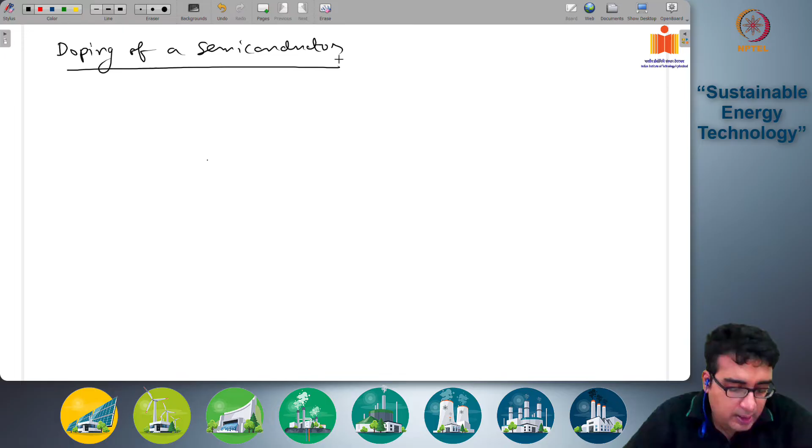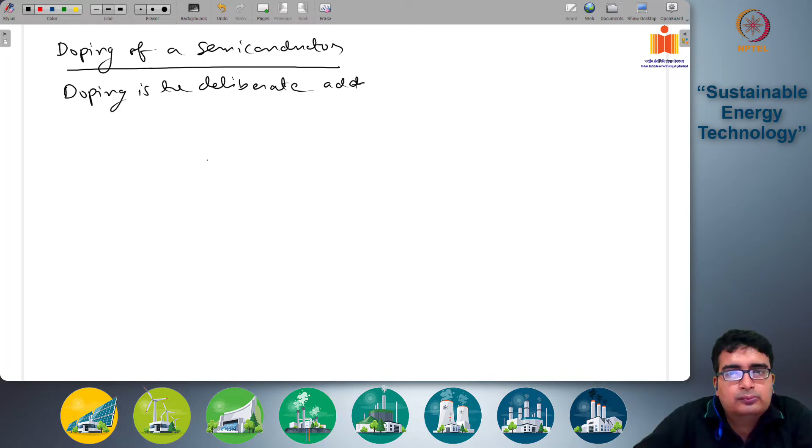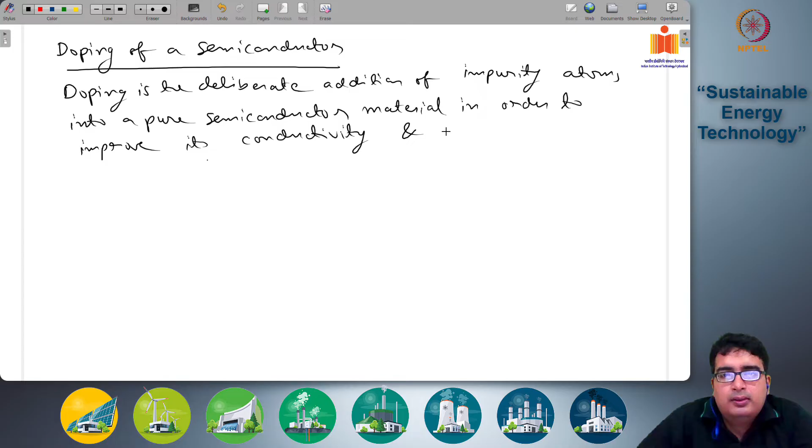Now, today we will discuss the concept of doping, which is very important in order to generate the PN junction diode. So today we discuss doping of a semiconductor. So here doping is the deliberate addition of impurity atoms into a pure semiconductor material in order to improve its conductivity and other electrical properties.

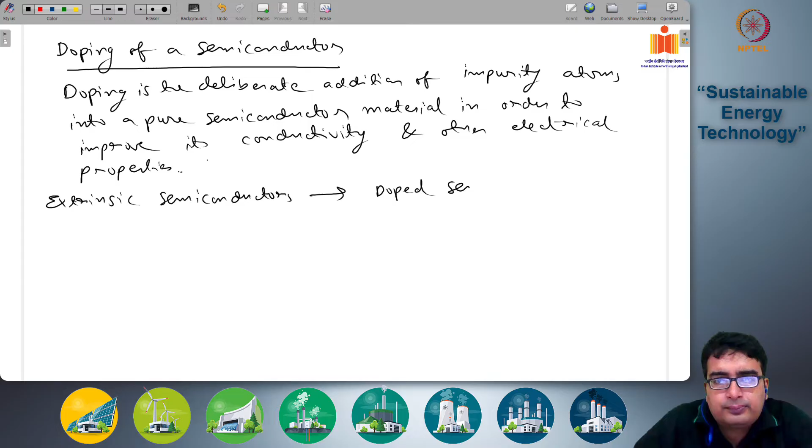So doping is you are adding a specific impurity atom into your pure semiconductor material in order to improve its conductivity and other electrical properties. So we have two terms. One term is called extrinsic semiconductors. These are doped semiconductors. And intrinsic semiconductors, which are pure semiconductors.

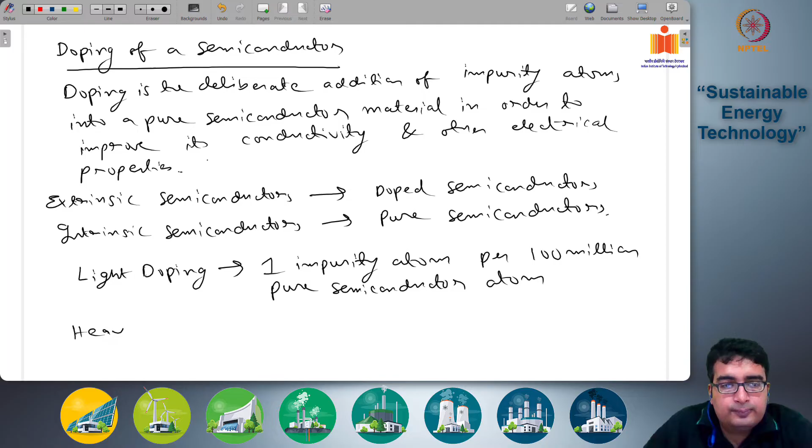Okay. Now the amount of impurity added is usually quite small. So we have several levels of doping. We call light doping to be the case that one impurity atom per 100 million pure semiconductor atoms. Okay, and heavy doping involves around one impurity atom per 1000 pure semiconductor atoms. So this one is parts per billion level and this is parts per 1000 level. So light doping and heavy doping, and you can have multiple ranges between these two as well.

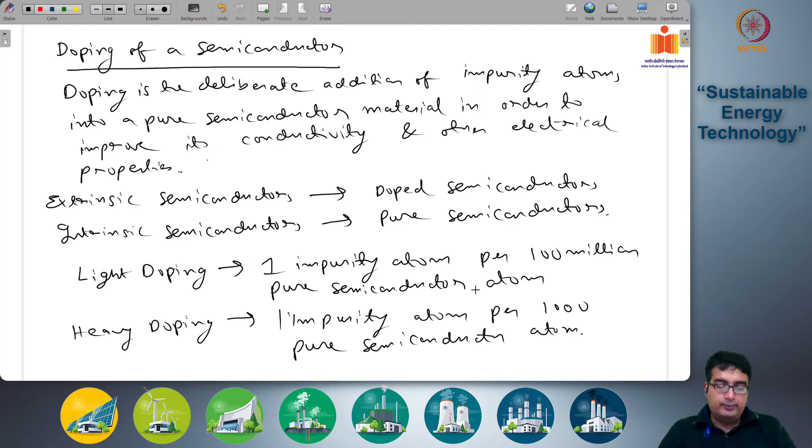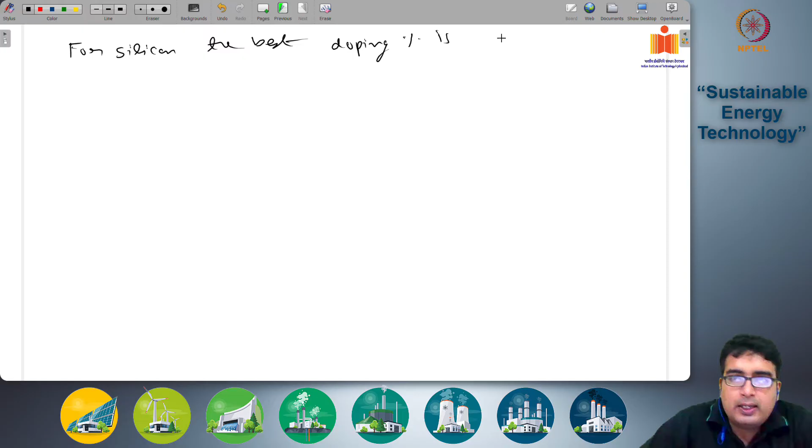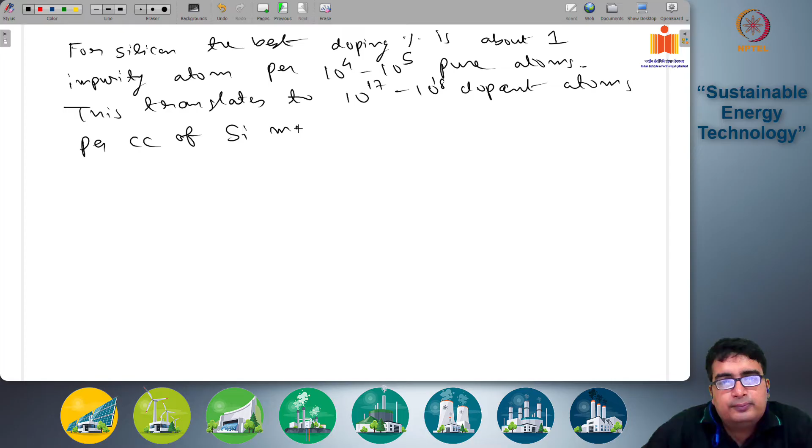For silicon, the best doping percentage is about 1 impurity atom per 10^4 to 10^5 pure atoms. So this translates to 10^17 to 10^18 dopant atoms per cc of silicon material. Okay. So for silicon, the best doping percentage is 1 atom per 10^4 to 10^5 pure atoms, which usually translates to 10^17 to 10^18 impurity dopant atoms per cc of the silicon material.

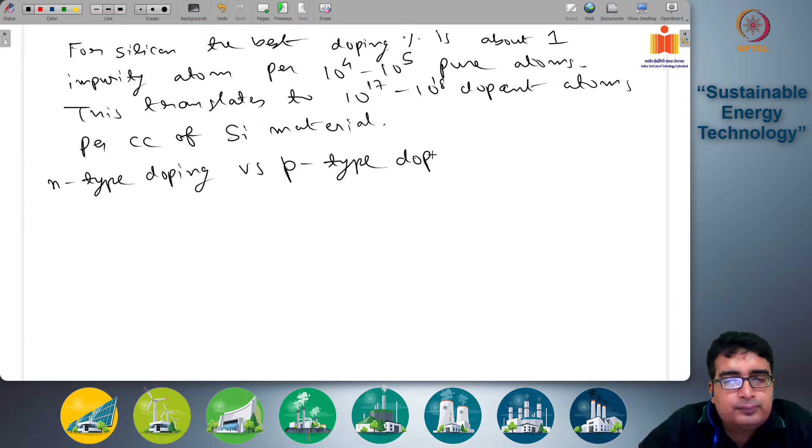Now, doping itself is used to improve the electrical properties, conductivity properties of silicon and other semiconductors. Now, why and how does this work? To understand that, we will see that there are two types of doping. One is called N-type doping versus P-type doping. Okay, so there are two types of dopings, N-type and P-type doping. Now, silicon has 4 electrons on its outer valence shell.

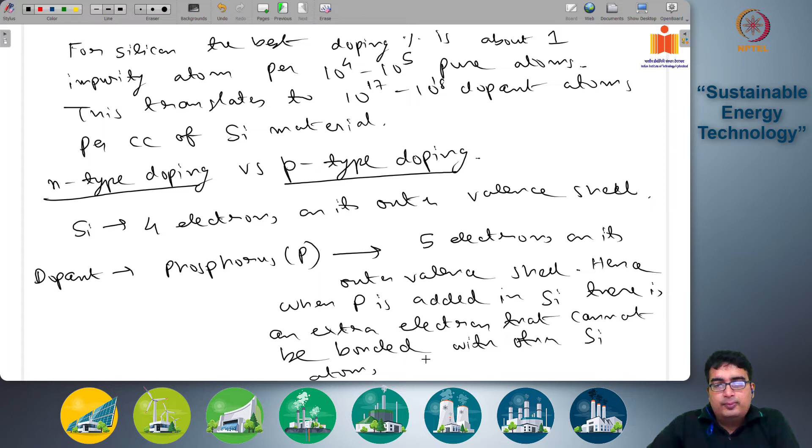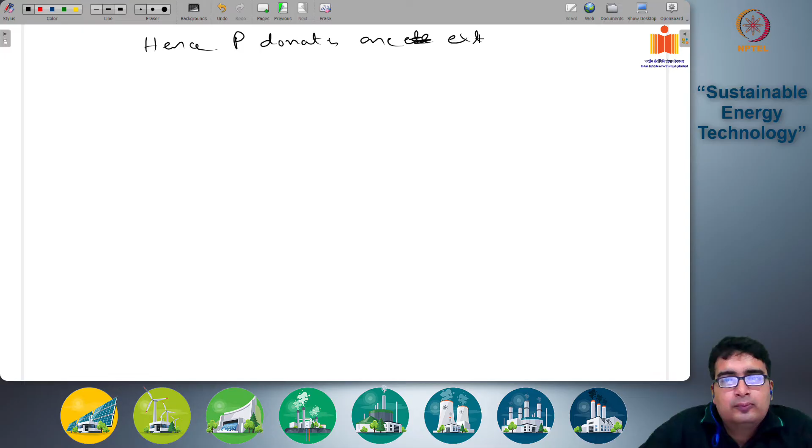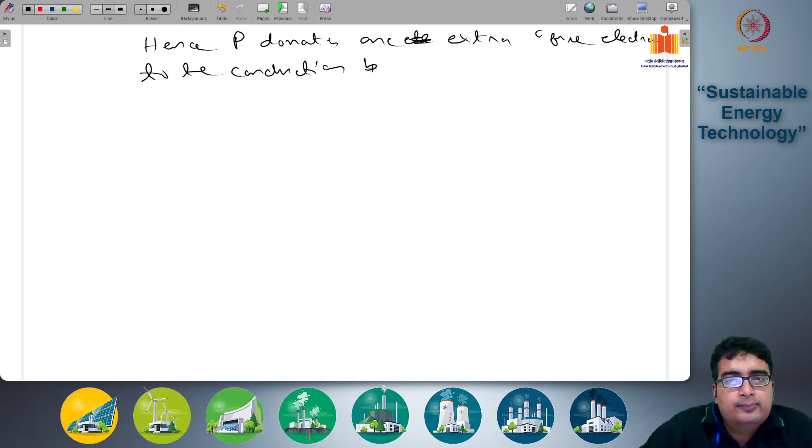So suppose you use phosphorus as an impurity. So dopant is phosphorus. This has 5 electrons on its outer valence shell. Hence, when phosphorus is added in silicon, there is an extra electron that cannot be bonded with other silicon atoms. Hence, phosphorus donates one extra free electron to the conduction band. Hence, it is an N-type dopant.

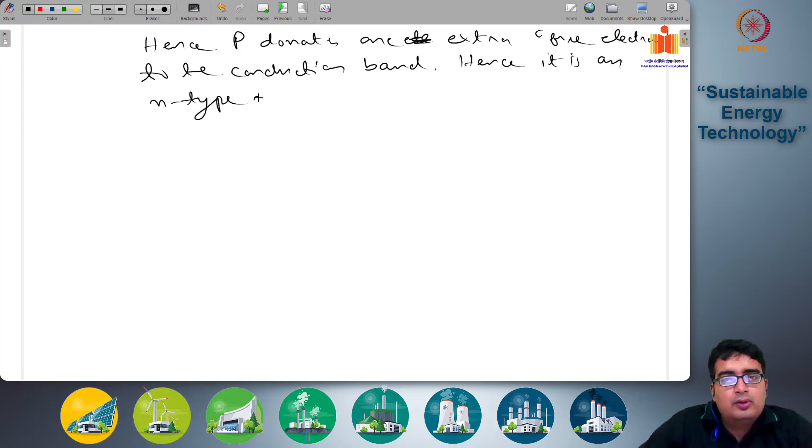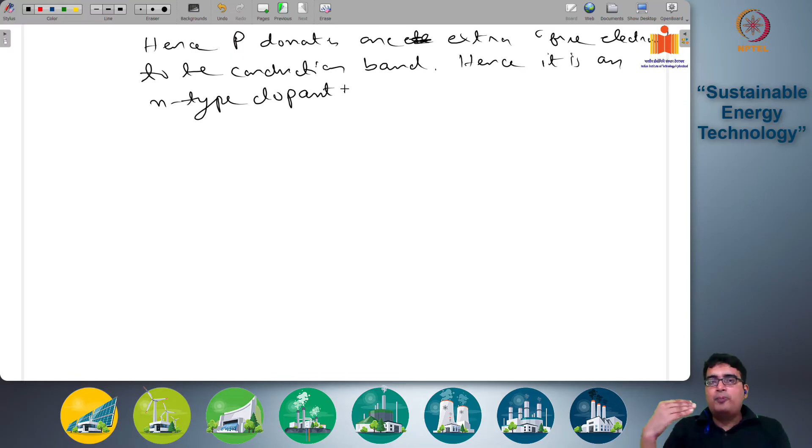So basically what is happening, silicon has 4 outer electrons on its valence shell, while phosphorus has 5. So when phosphorus is added as an impurity atom within the silicon structure, then there is one extra electron with phosphorus that cannot find a pair within the neighboring silicon atoms. And this extra electron becomes a free electron that is donated onto the conduction band of the silicon atom structure. And therefore, these are called N-type dopants because they act as electron donors, as they are a source of extra free electrons.

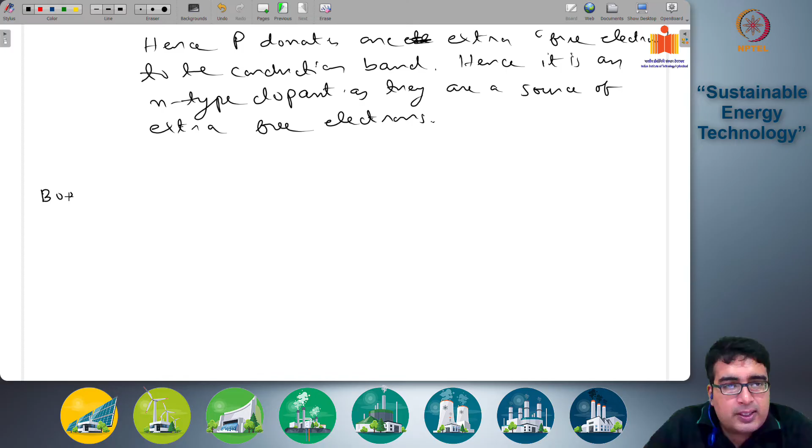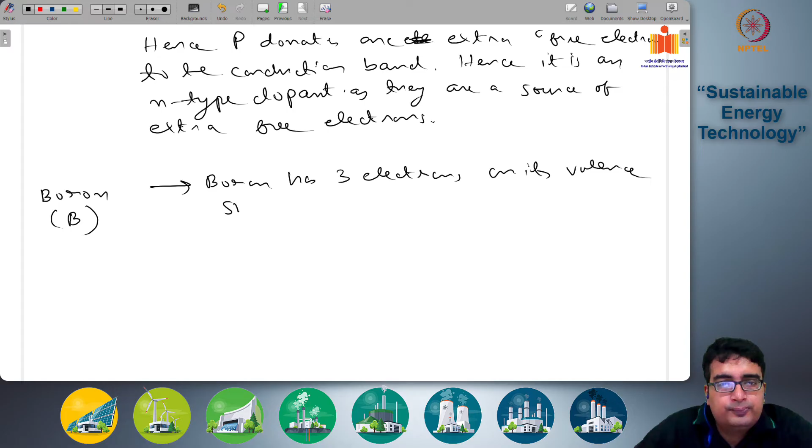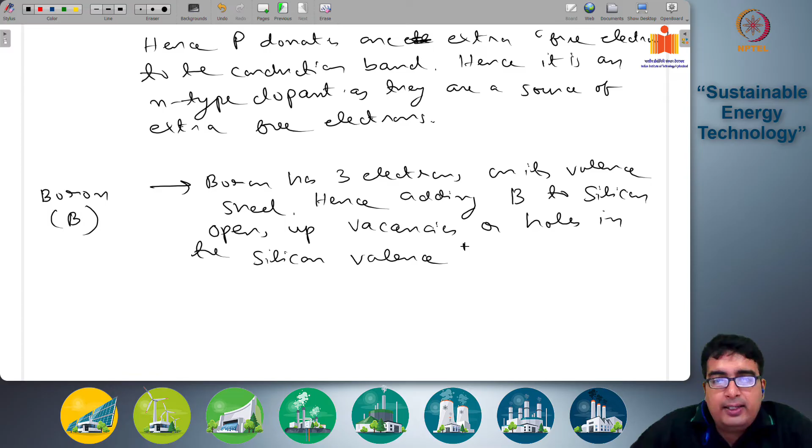But suppose instead of phosphorus we use boron. So boron has 3 electrons on its valence shell. Hence, adding boron to silicon opens up vacancies or holes in the silicon valence band, which can conduct electricity. Hence, these are called p-type semiconductors, as they act as a source of extra holes in silicon valence band.

So boron has 3 electrons on its outer valence shell. So if you add boron within the silicon structure, there will be one open space which cannot be filled by an electron around boron. So an extra hole is added into the valence band of your silicon material when boron is added to it. And this extra hole is also like a free vacancy which can move from one atom to the other, and hence can transport charges. So these are hence called p-type semiconductors, because they act as a source of extra vacancies in your silicon structure.

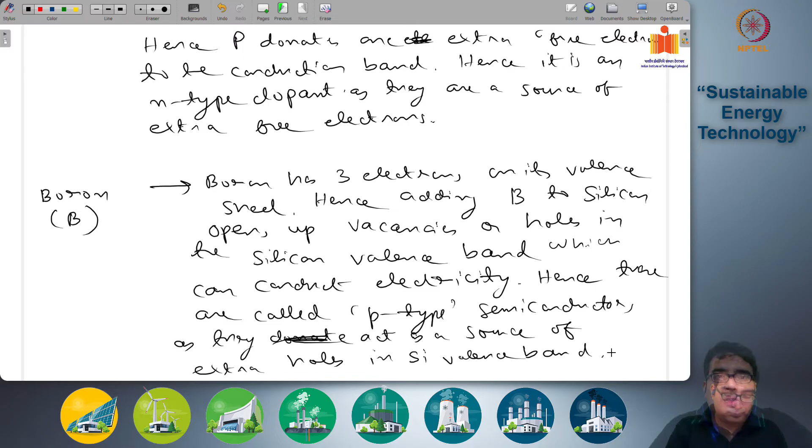So the idea is then like this. This is your pure silicon. This is your valence band. This is your conduction band. Okay. Now this is pure. Now we look at N-type. So suppose phosphorus has been added to it. Then close to the conduction band, the addition of phosphorus creates an extra zone of free electrons coming from the phosphorus impurity very close to the conduction band.

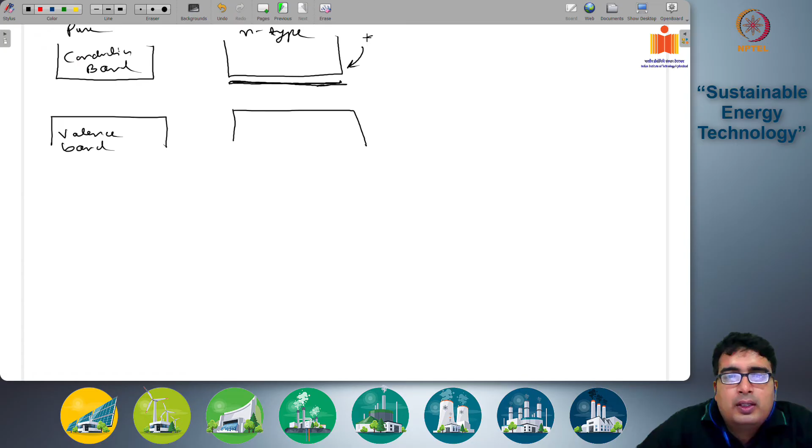Extra electron level. Okay. And these are very close to your conduction band, and hence these electrons can easily be promoted to your conduction band and hence help in conducting electricity

coming from dopant. Okay. Whereas for a p-type case, you have a set of empty spaces opening up close to the valence band. So these are extra vacancies from p-type dopant. So these holes here can easily move down, and these holes can move here. Okay.

As electrons can move from here to create this empty space here and fill up this empty space here. So it's as if the vacancies are moving down into your valence band. And this is called a p-type semiconductor. Now the effect of N-type and p-type doping is to raise or lower the Fermi level closer to the conduction and the valence band. So what it looks like,

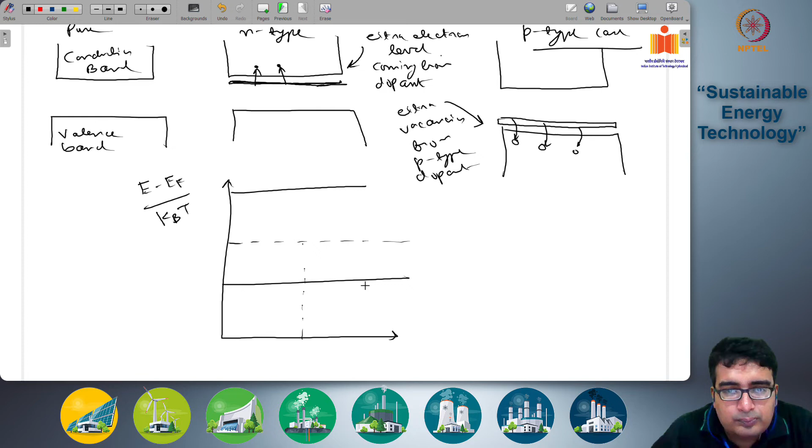if you look at the N-type case, if you plot E minus EF by KBT. Okay. Then suppose this is your conduction band and this is your valence band. Originally, the Fermi level was here. Okay. This was your EF for the pure semiconductor. Okay.

Now what happens? Because of the presence of the N-type dopant, your Fermi level actually moves upwards towards the conduction band. So this is EF N-type. Okay. So then your Fermi level has moved upwards, and hence as a result you are getting far more electrons in the conduction band, whereas there hasn't been any change in the number of electrons in the valence band, because you have as many electrons coming from silicon. The extra electrons in your conduction band are coming from the phosphorus atom.

Okay, so this has an effect of raising the Fermi level closer to your conduction band due to the presence of this N-type semiconductor dopant. Now, the exact opposite is the case for holes. So, holes are empty spaces. So, we can evaluate the probability of a hole by plotting, instead of F, 1 minus F, the empty fraction. If F is the filling fraction, 1 minus F is the vacancy fraction. Okay. So we can do the same thing for 1 minus F. So here you have again your conduction band and this is your valence band.